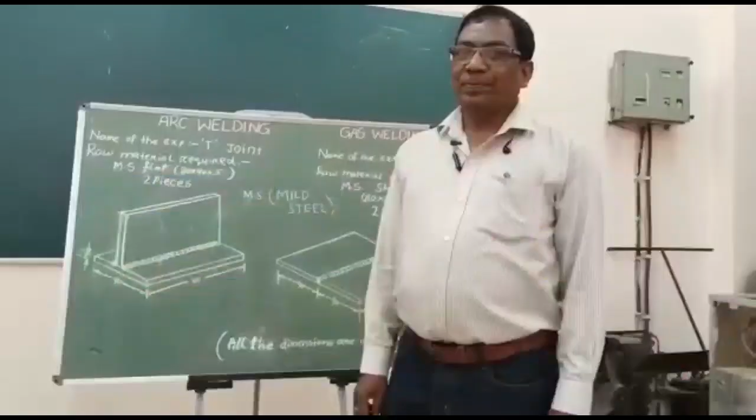Do you understand how welding is done? Now we will do a welding job using arc welding.

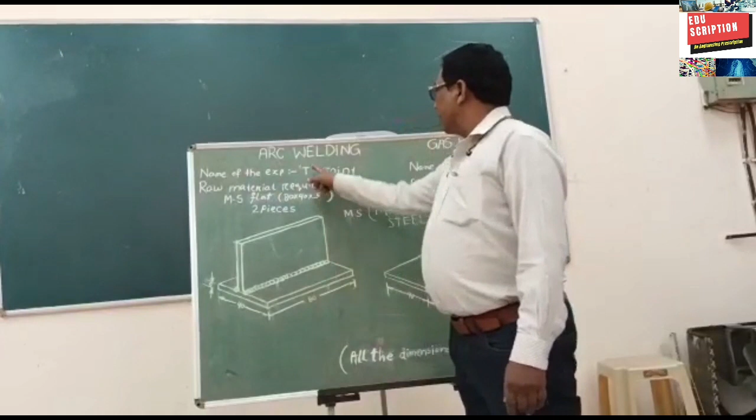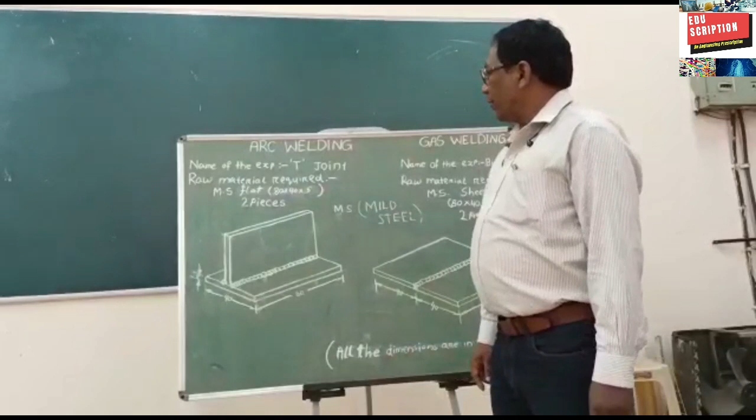Name of the job or experiment: T-joint. Raw material required: 2 pieces of MS flat of size 80 into 40 into 5 mm. MS means mild steel.

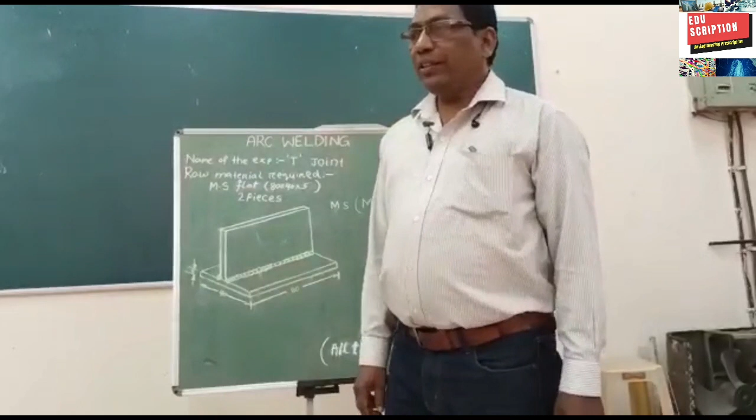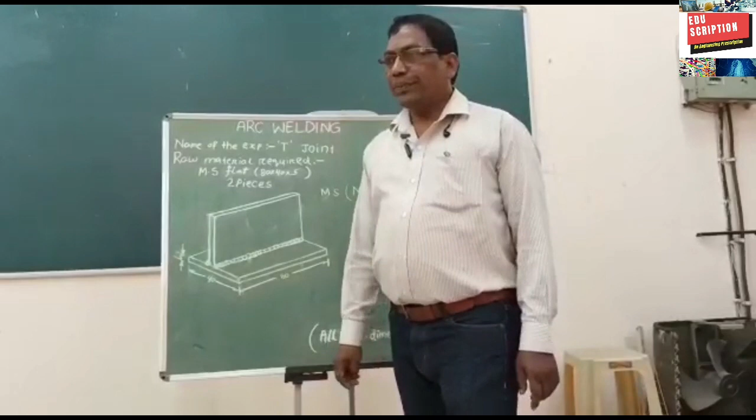Now we collect the material, mark it, then cut and prepare it to the proper size for the welding material. Now we go to the welding table, the marking table.

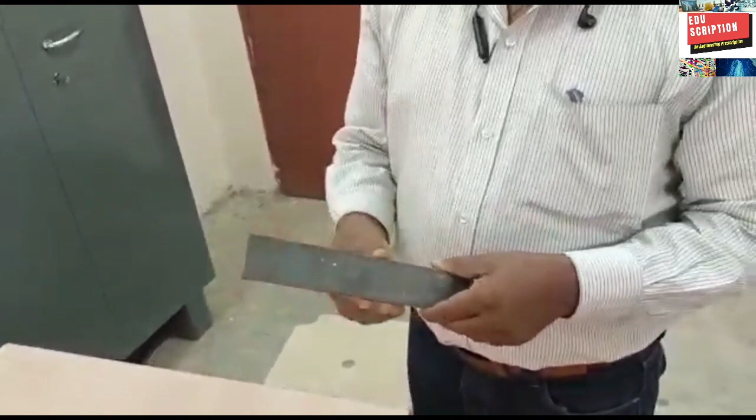This is the 40 mm width MS flat and 5 mm thickness metal. Now we mark it.

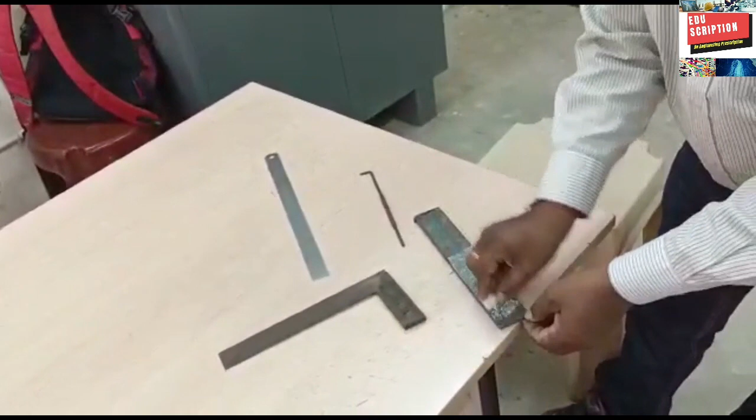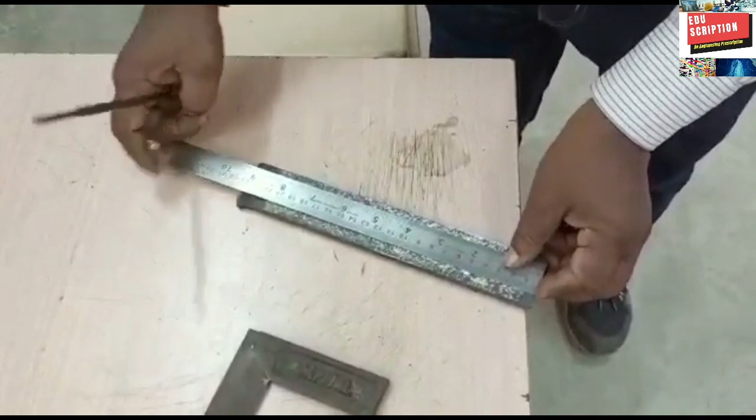80 plus 80 is 160, so at a time we measured 160 mm.

By using a scriber, we draw the line of the rectangle at right angles.

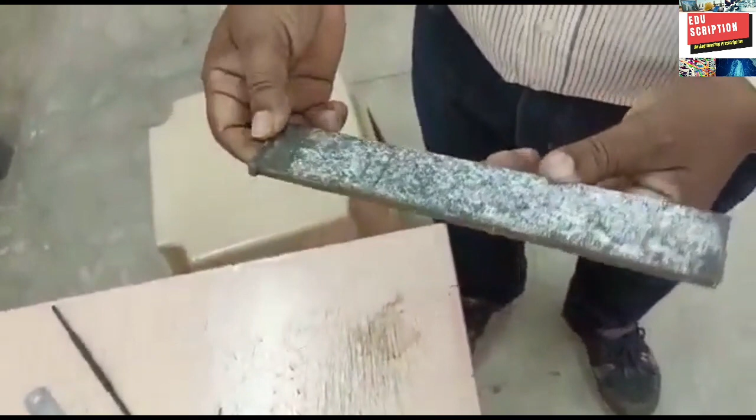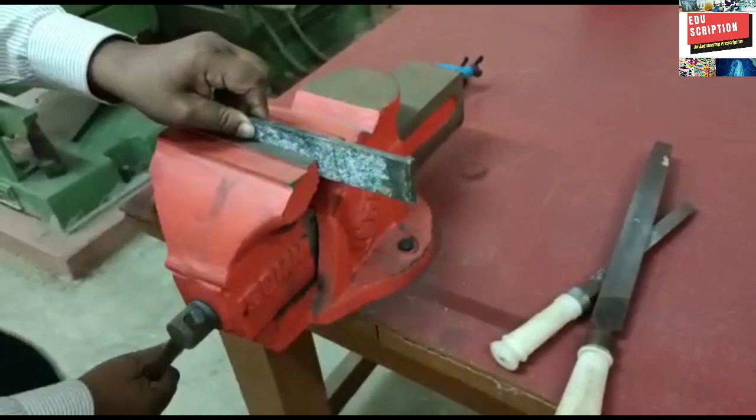Now cutting at this position using a hacksaw, holding the piece on a bench vise. Now we hold it on the bench vise and cut it with the hacksaw at the marked position.

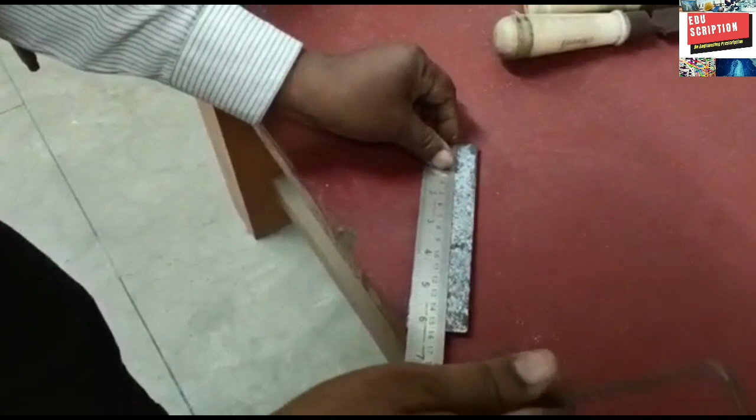Now this is the 160 mm job piece. We divide it into the middle position, which is 8 cm or 80 mm.

Again we cut it at the marked position.

Now we polish the two piece of metal properly for welding purpose.

At first side, using the card file, then another side, you properly file or polish to remove the rust from the material.

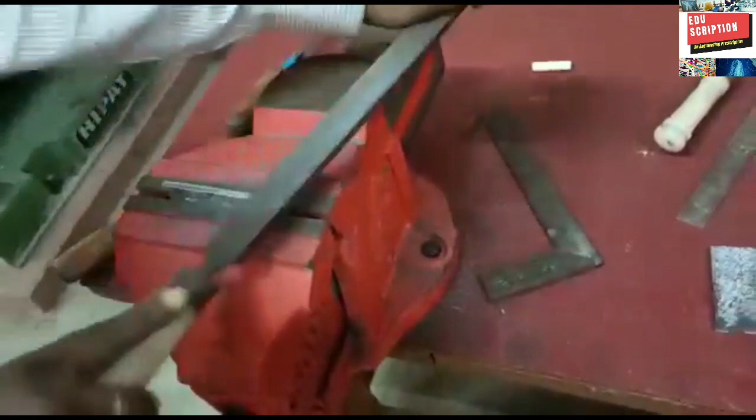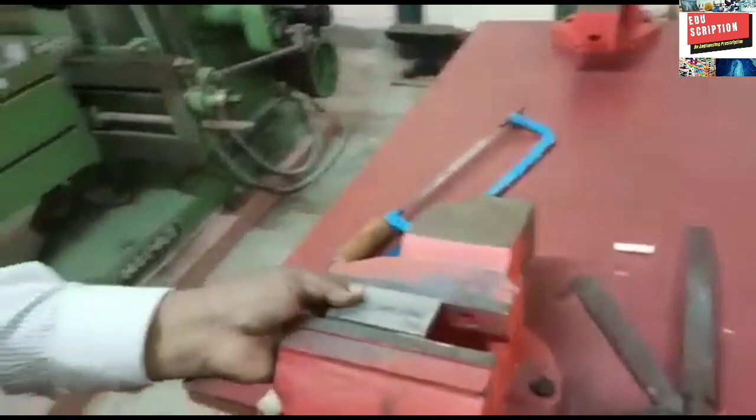Now both sides of the flat position, we place it this way and hold it. I will polish it. Complete this side, then another side, polish it properly to remove the rust, for better holding.

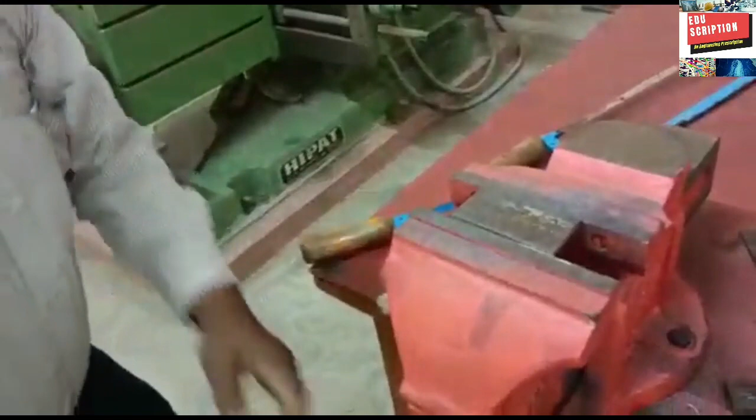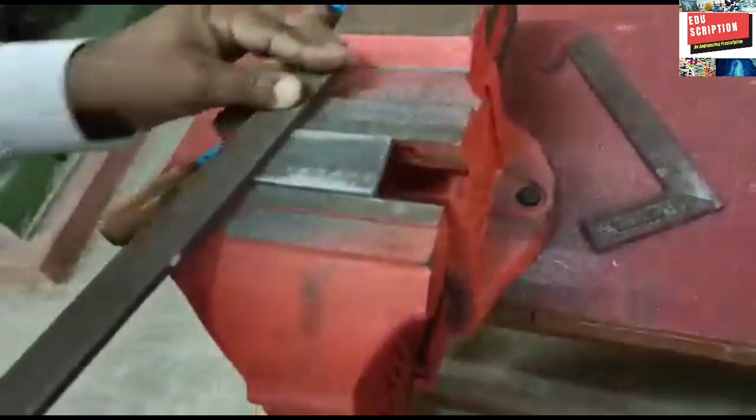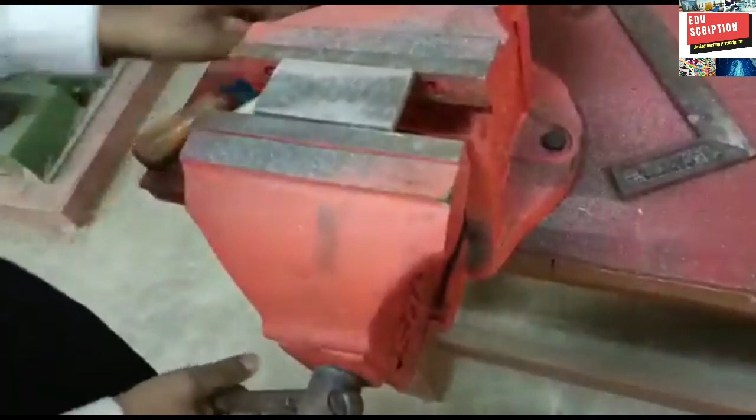Now this is another piece; it is also polished. Now complete the polish. Now we can do the holding with this polished job.

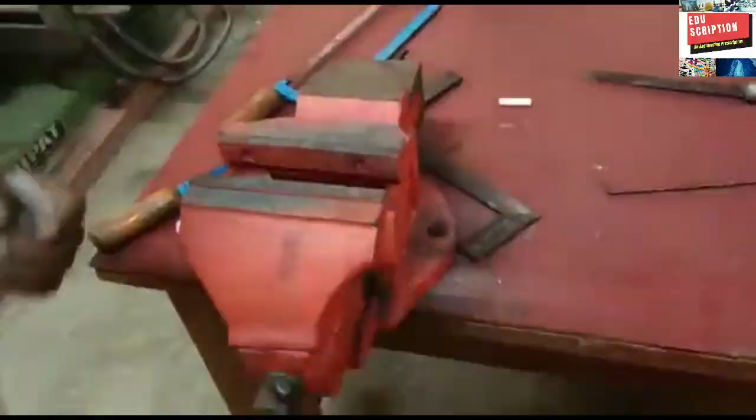Now we go to the welding table. This is the apron; you wear it to protect your body from spattering.

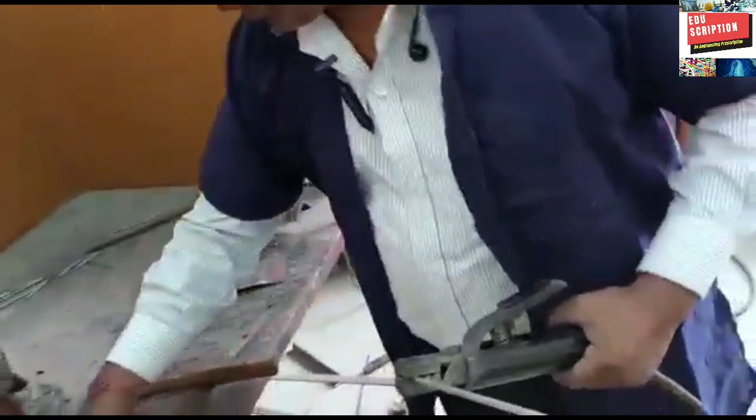Now start the welding machine. Now set the current. This is the electrode already fitted. Now we place the job on the table because the table is the cathode or earthing point.

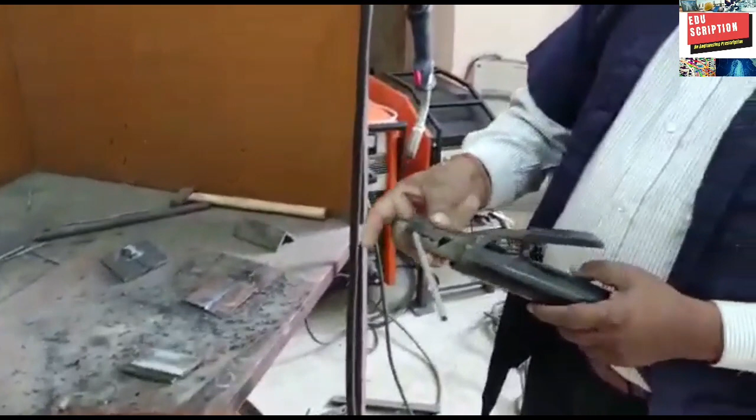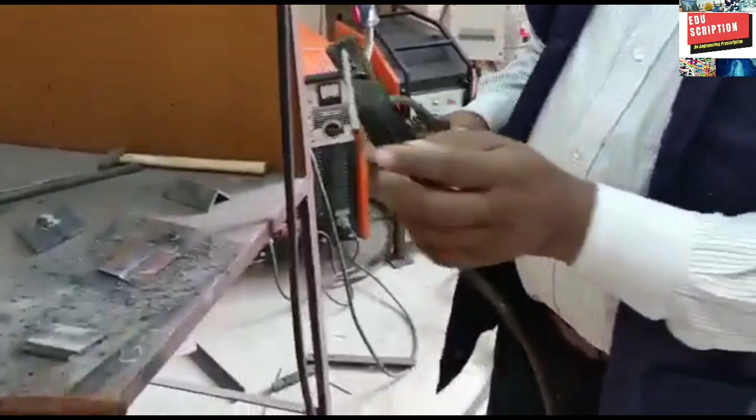Now the machine is already started. Now you touch the anode point, you do not feel any shock, and if you touch the earthing point, again you do not feel any shock. But when it touches directly, then a spark is created.

Now place the job in T shape, wearing the hand gloves.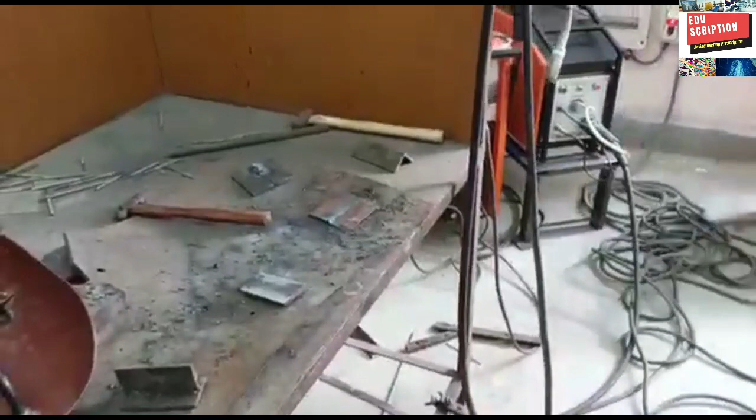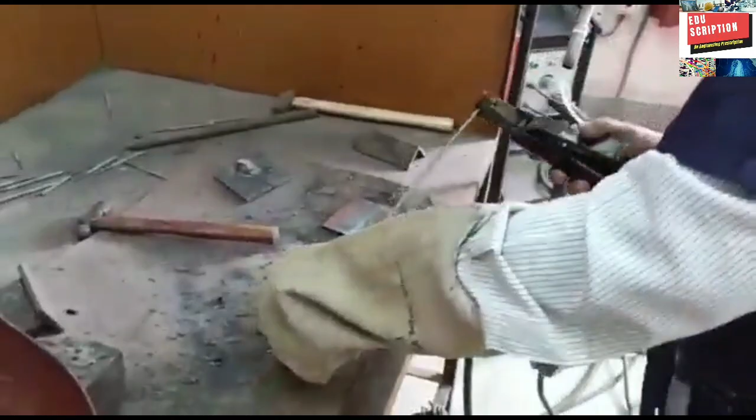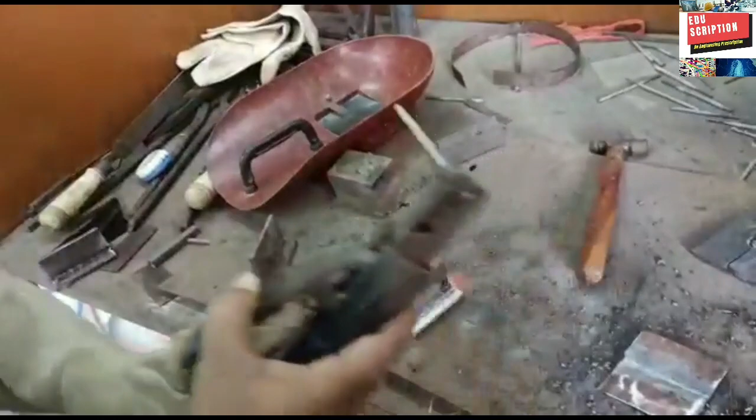Now the T shape is done, see this is the T shape. Now you completely do the welding without leaving the electrode at a time.

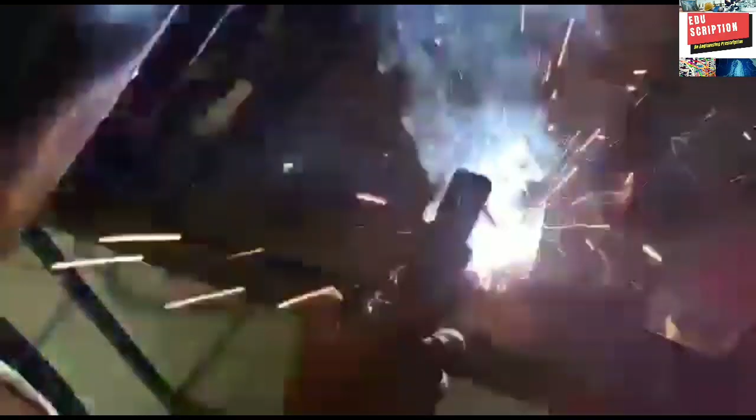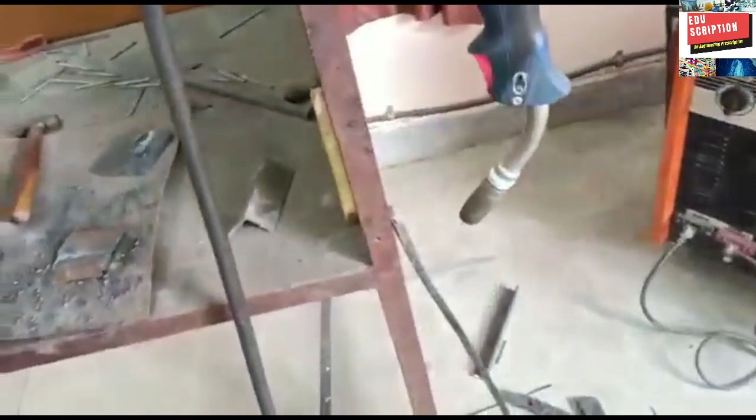Another side, again you do the welding on the other side.

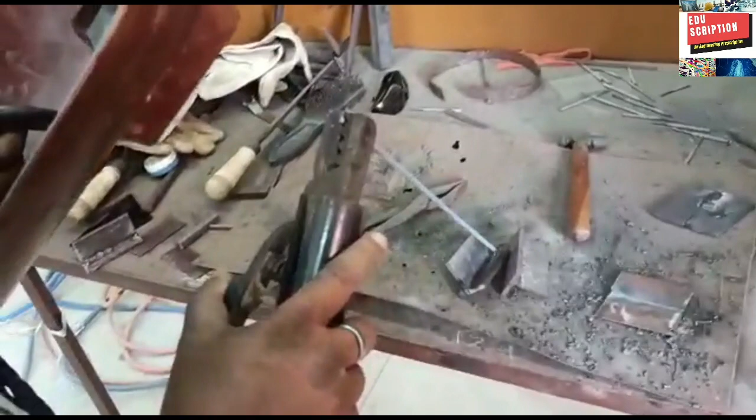When you do the welding, at that time you must maintain the arc gap of 2 to 5 mm distance between the job and the tip of the electrode.

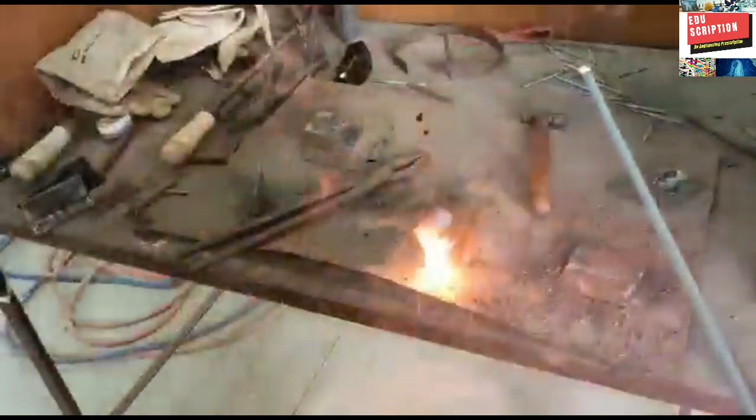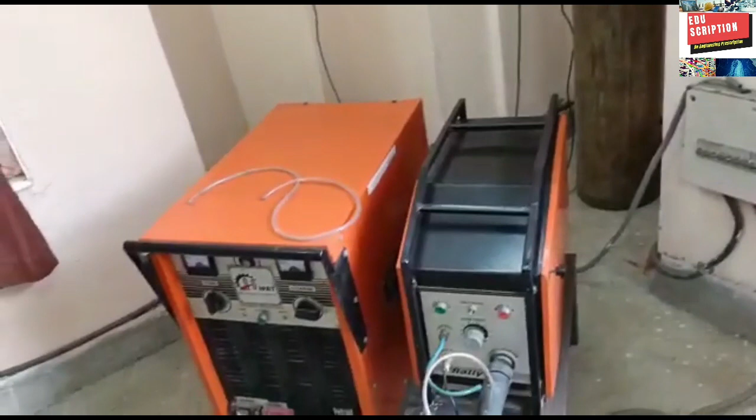Now complete the welding. Now you switch off the welding machine. Now this is the complete welded job.

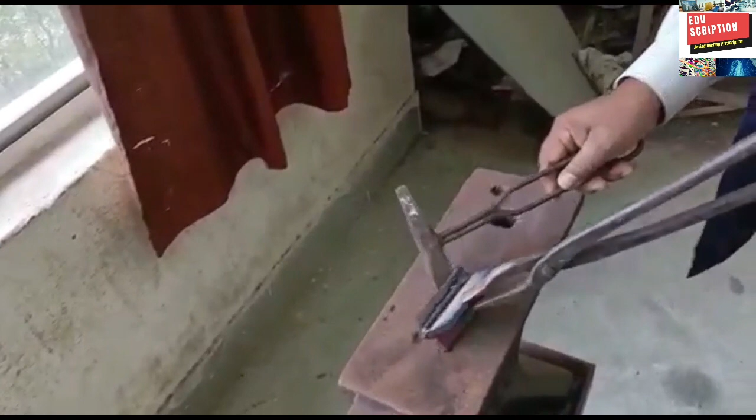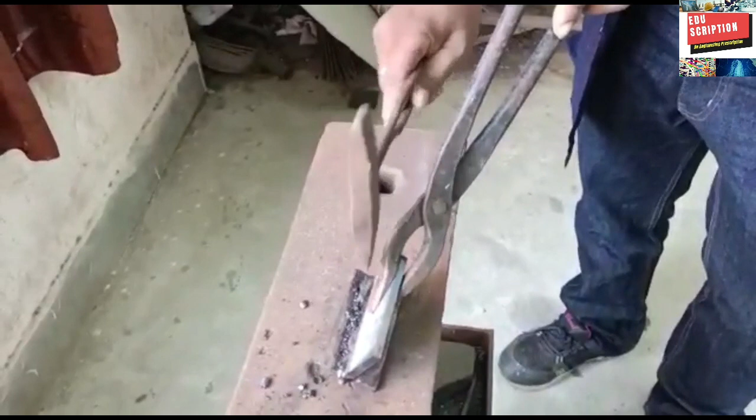Now you clean the welding surface using a chipping hammer, which carbon-type material comes out from the job or welding bead, that is the slag. Slag is created after burning of flux.